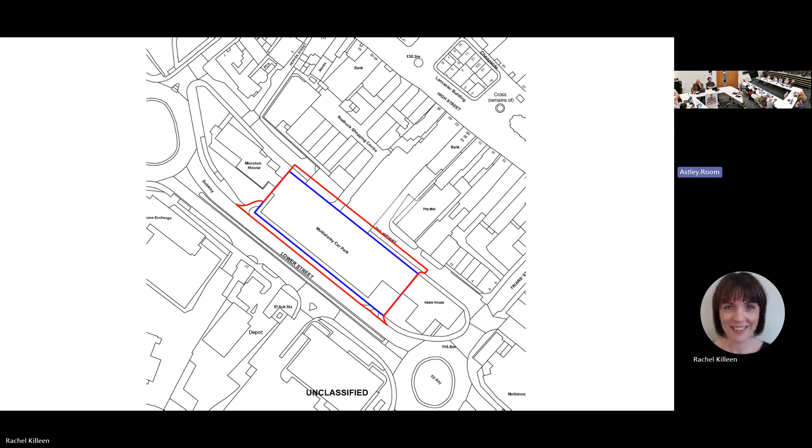It fronts Lower Street, Ring Road to the southwest, and the Midway to the northeast. The proposed scheme would comprise 78 one-bed and 33 two-bed apartments across 5 floors. Significant elements of the existing car park structure would be retained and repurposed, and the footprint of the building would remain the same. Cuts to the existing slabs and central spine wall would create a central void and open up the existing interior to create new internal circulation spaces, with a new roof structure added at roof level to provide additional residential accommodation.

This is the floor plan of the lower ground floor, which fronts onto Lower Street. You'll be aware there's quite a significant difference in levels between Lower Street and Midway, which is why this is a lower floor. Vehicular access on Lower Street at this point would be retained, providing access only to the substation and plant, which is in this area here.

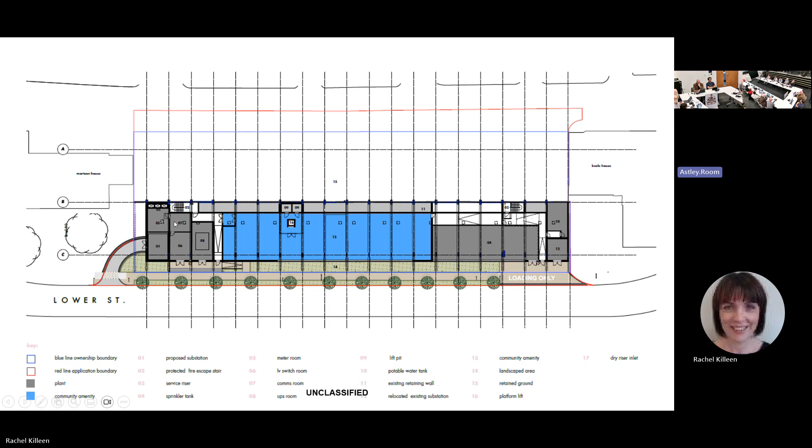Moving on to the first floor, a new vehicular access would be formed at the eastern end of the Midway site frontage, here into the car parking area. The car parking area is underneath the level of the Midway, so access would be down this ramp into the parking spaces.

A drop-off lay-by is proposed on the Midway frontage outside the main entrance. Refuse collection and other servicing would be focused on the Midway, with the bin store also on that frontage. Loading bay areas would be provided on the site frontage as part of a new landscaped area for use by refuse collection and other delivery vehicles. The site management team would move the bins to this area for collection. Domestic and community waste and recycling stores would be incorporated at level 2 and accessed directly from the Midway.

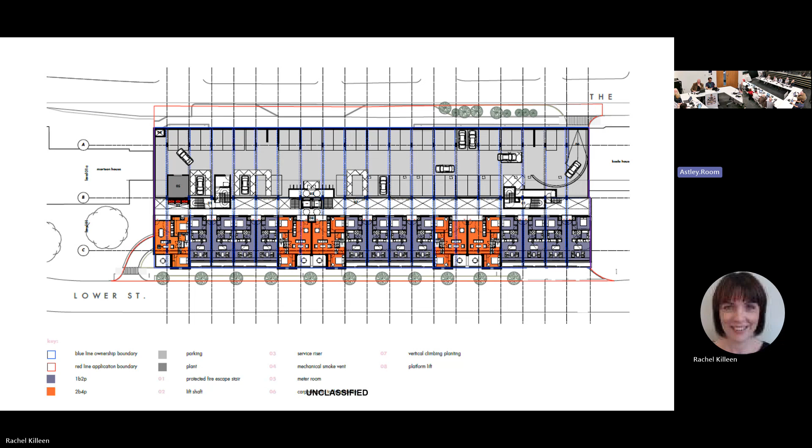49 car parking spaces are proposed, comprising 45 standard spaces and 4 accessible spaces. 116 cycle spaces would also be incorporated across the development. The Highway Authority has no objections to the application, subject to conditions.

This is what's referred to as floor 2, but from the midway level it's the ground floor in effect, and the main entrance into the building. This is the main entrance courtyard, in a centralised location, providing level access from the midway. This would utilise the existing vehicular entrance to the car park.

From this main entrance, apartments would be accessed via open air walkways, framing the new void space between the rows of accommodation. All accommodation will be provided with a recessed balcony or terrace, providing significant elements of private amenity within the scheme. Further amenity space would be proposed with a communal roof terrace at level 5.

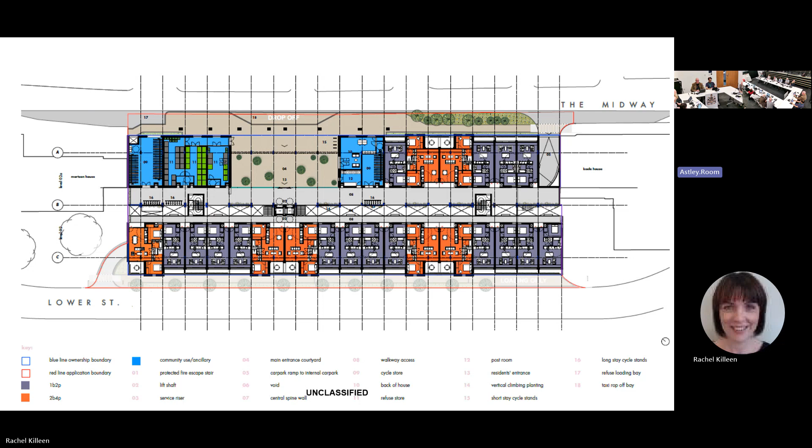Just looking at the other floors - this shows the general arrangement. We've got here a mix of 2-bed and 1-bed apartments, and this is the void that I referred to previously above the main entrance.

This is the amenity space on the roof level. These are the units that you'll see later coloured in red that are at roof level.

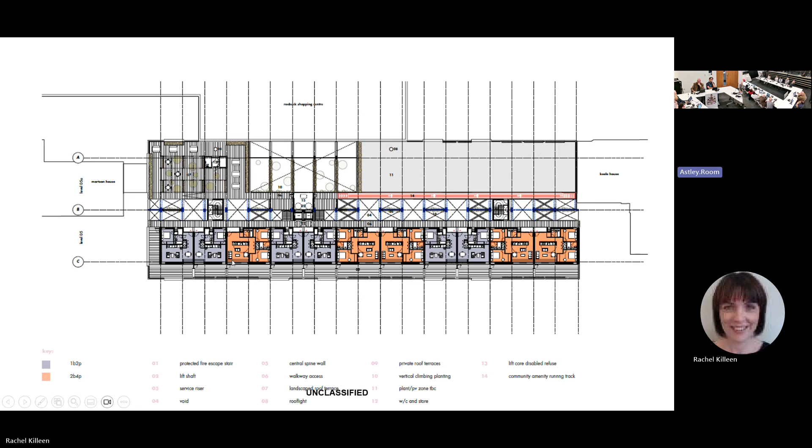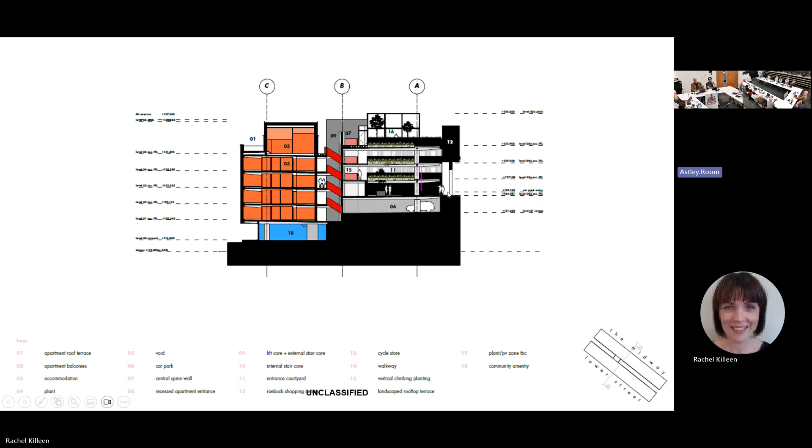This is a section through the development taken centrally, just to show you the difference in levels. We've got Lower Street here and Midway here. That's the main entrance for pedestrians into the building, and as you can see, the car parking is underneath and accessed via that ramp.

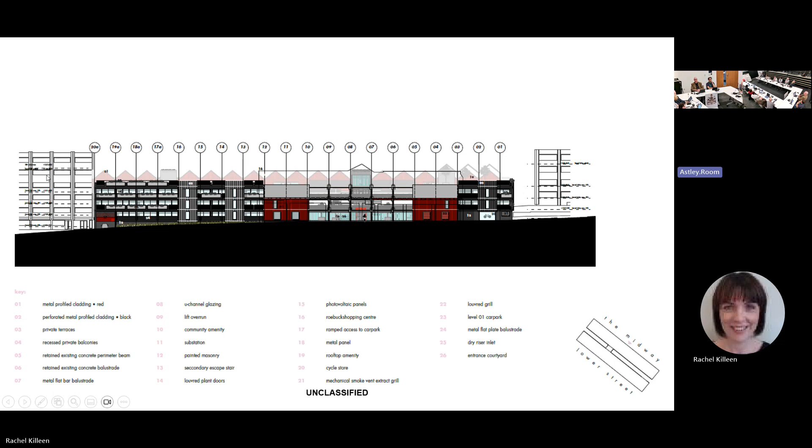It doesn't show particularly well given the scale of the building, trying to show it at this scale. But you can see there, that's the elevation on Midway, and that's the entrance I've referred to several times. You can see Morston House, which has got planning permission recently to convert to residential, and that's also residential accommodation at the other side.

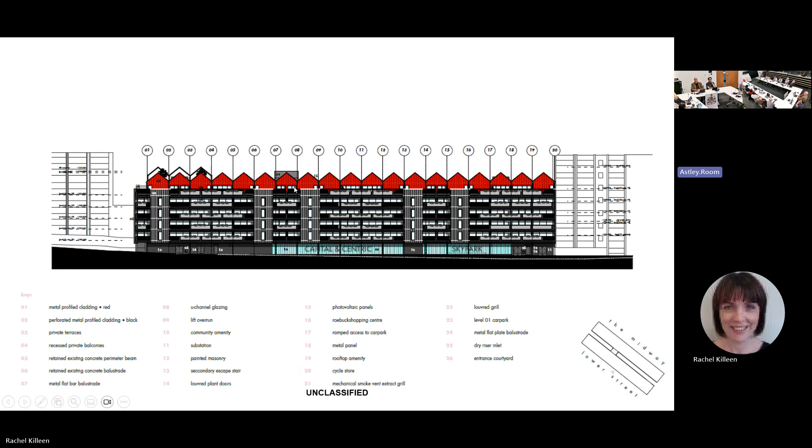So that's the elevation from Lower Street. These are the additional residential units that are being added onto the roof of the building.

This is a section just to show in more detail the proposed materials. There'll be a combination of the existing grey concrete structure of the existing building with red, black and charcoal coloured cladding. The new roof structure would be a series of pitches, and the gable ends to those pitches would be clad in red square profiled metal.

Columns of black perforated corrugated cladding would feature at regular intervals along the frontages to Lower Street and Midway. The proposed new facades are designed to be contemporary, but to draw reference from the architectural features and tones of the area. It's considered that the articulation of the roof pitches would add variety to a mixed roofscape, in contrast to the existing expansive area of flat roof.

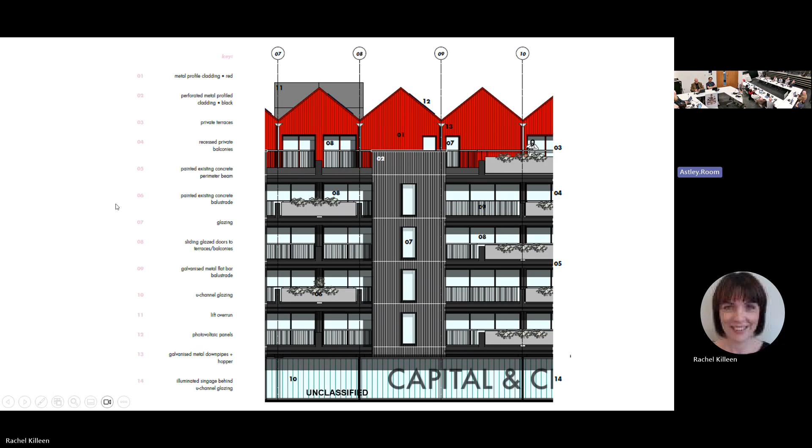That's probably the best image to show you overall how it's proposed that the building would look. It's considered that the scale and design of the development would be appropriate, and with the implementation of an appropriate landscaping scheme to soften the building, it's not considered that there would be any adverse impact on the character and appearance of the surrounding area.

The site is within the conservation area, as I mentioned previously. A heritage statement that accompanies the application concludes that there would be no harm to the significance of designated or non-designated heritage assets, stating that the proposed development would repurpose and enhance a building that is recognised as currently making a negative contribution to the conservation area.

Your officers agree, stating that the development would make a positive contribution to the area. The introduction of a residential use in this area should benefit the town centre, making it a more vibrant place, providing more activity and natural surveillance in this area of the town centre, and should help to lift the area. Thank you.

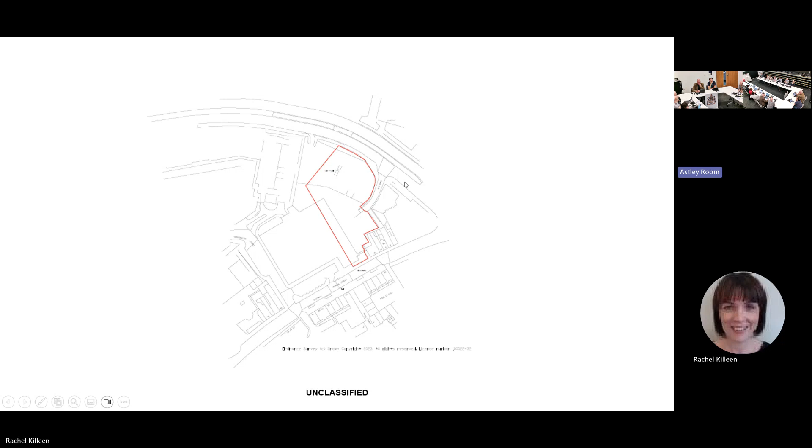Full planning permission is sought for a development of 53 retirement apartments, which would be age restricted to 55-year-olds and above. The site is part of the wider master plan aspiration for Ryecroft, which includes a multi-storey car park and a residential development scheme that Mr. Crews made reference to, which we'll be looking at later on the agenda. This is the current scheme we're looking at now. The site adjoins the Newcastle Town Centre conservation area.

The proposed 4-storey development would comprise 37 one-bed and 16 two-bed apartments, all self-contained with communal facilities, including a shared residence lounge, mobility scooter store, attached refuse store, and communal garden.

The location of the development has been dictated by the existing site constraints and the shape of the available plot. Here you can see the footprint of the building on the site. It would be L-shaped with the longer elevations facing the wider Ryecroft site, while the shorter elevations would face Ryecroft here and the rear elevations of buildings along Merrial Street here.

This is the access into the site off current Rye Bank. There is currently an access at that point. There are 2 other accesses into the site which will be closed off, so that will be the sole access, and this will be the car park area here to the rear.

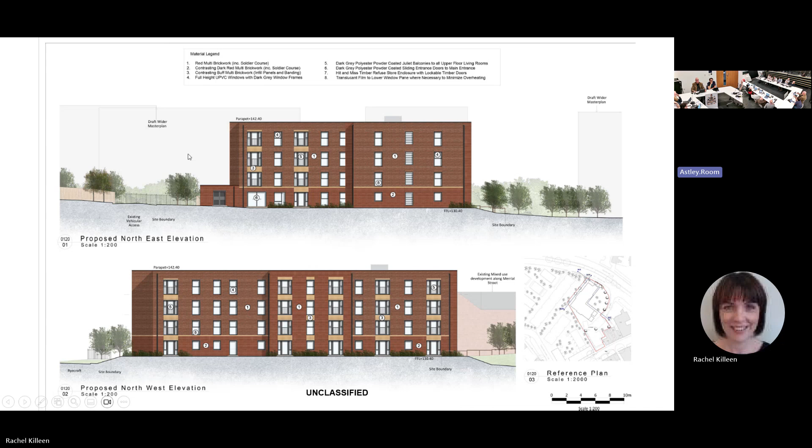It's considered that the design and massing of the proposed building would be consistent with both existing development and that proposed on the remainder of the wider Ryecroft site. As said earlier, access to the site would be from Rye Bank, with a car park proposed to the south of the building, providing 22 spaces, including 2 accessible spaces.

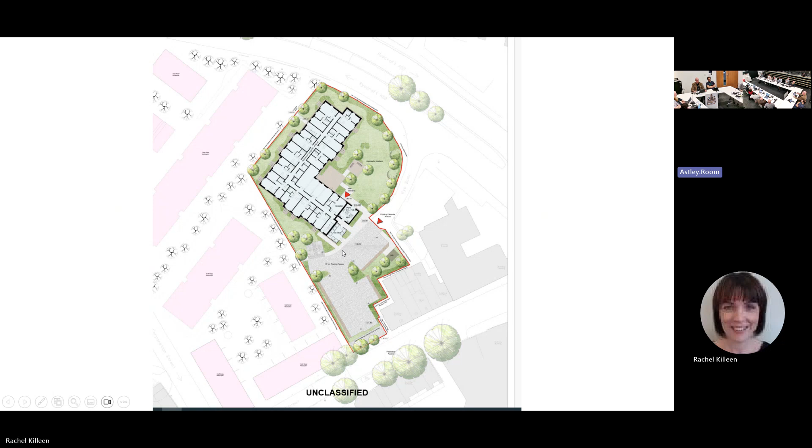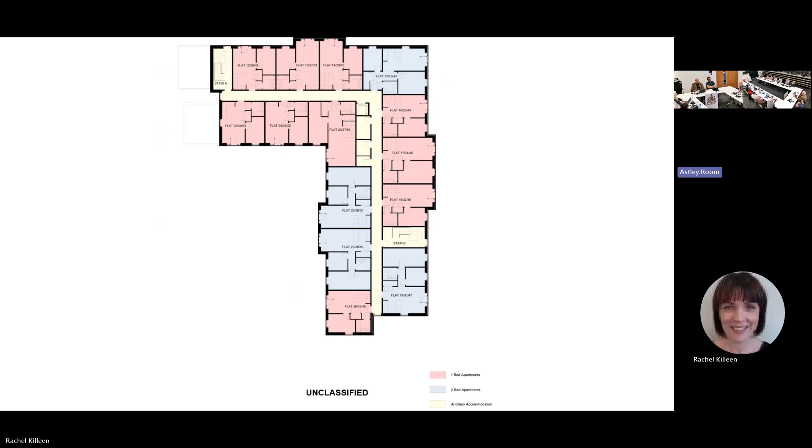The maximum parking standards in the local plan for this type of development require a maximum of 1 space per 3 dwellings, which equates to 18 car parking spaces for the proposed units. A transport statement submitted with the application looks at other McCarthy Stone schemes in comparable locations and concludes that 22 car parking spaces would be suitable for the proposed development. No overspill parking is anticipated, with suitable on-site provision provided in balance with expected demand and local standards.

A heritage statement accompanying the application concludes that the proposed development will cause no harm to how the significance of the conservation area is understood, and that there are no other designated or non-designated heritage assets which would be adversely affected by the development. The Conservation Officer agrees with the findings of the heritage statement and raises no objections to the scheme.

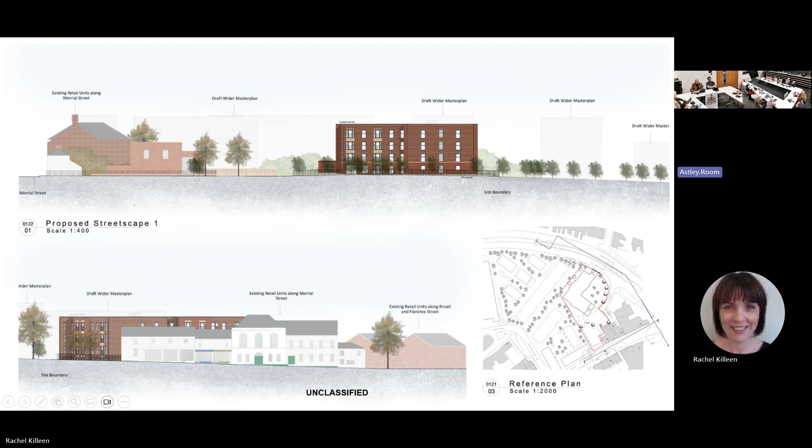These are streetscape views just to show you the relationship of the building with the existing and proposed development. These are the existing buildings on Merrial Street. The wider master plan developments will be behind that building and over to the right hand side here. This is a view on Merrial Street showing the existing buildings at the frontage, and then the building behind.

This is a previously developed site in a highly sustainable location within the area. The site is an easy walking distance of the shops and services of the town centre. It's considered that the site provides a sustainable location for additional residential development that would accord with the town centre supplementary planning document.

Thank you, Rachel. As for the previous application, I'm not aware of any speakers or objectors to the scheme. I'll now open it up to councillors.

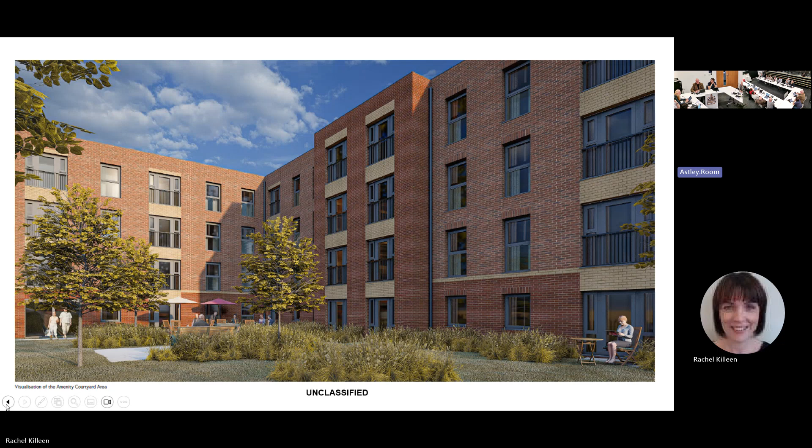Thank you, Mr. Chairman. Once again, I think we should welcome this scheme. This is a site in our town centre which has lain dormant for some time now. What we're seeing this evening is breathing new life into an area which desperately needs new life, to make the town centre live an extra time.

I welcome what the Conservation Officer says, and I thank the office very much for the drawings, which I think place the development in context and make it, certainly for me, far more understandable in that regard. I can see how the proposed finishing of the building will fit with the frontage on Merrial Street.

It's not a particularly ambitious building, but nonetheless it's not an unhandsome building, and it is a planning gain over the supermarket that was there prior to this site, and certainly a planning gain over the wasteland currently on that site.

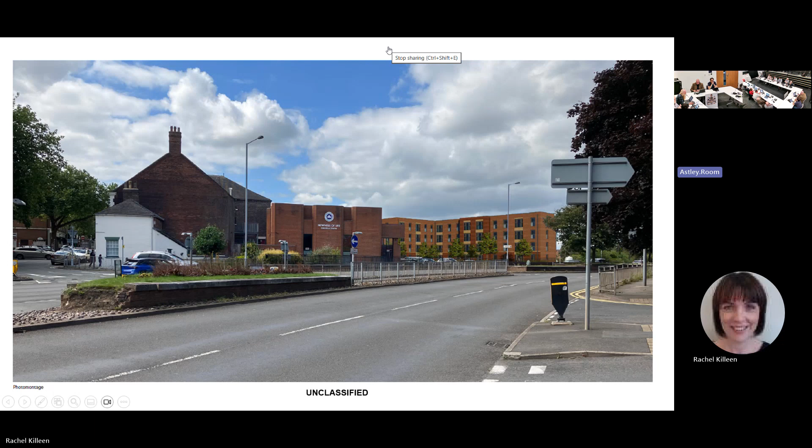As such, I think it shows that the council - and unfortunately I wasn't at the full council, but I know there was cross-party support for the regeneration of our town centre in this regard - and I think this once again shows that we are committed to breathing life into our town centre, making it a vibrant place. The fact that we're having residents within the town centre will help that in a very great way, in my personal opinion.

So once again, I welcome this development and would wish to move the recommendations as they're printed in front of us.

Thank you once again, Councillor Fear. Duly noted. Any other councillors wishing to speak? Councillor Wielden and Councillor Brown.

Just a comment really to say that it's an incredibly innovative programme of building yet again. People sometimes forget, when they're involved in developing, that the focus is on starter homes for young things. The over 55s tend to get forgotten, and as far as I'm concerned, they are the anchor of a community.

To be so well looked after, so that they've got everything on their doorstep, which this particular development has for the older population, is to be applauded and recommended. I think it's exemplary, and I congratulate all the councillors on planning who voted for it, and also the developers too who designed it.

Well done. Thank you, Councillor Wielden. Councillor Brown. Thank you, Chair. I would echo the comments already made.

I'm just a bit concerned about the parking specification on a 1-to-3 ratio. Over 55s these days certainly aren't the pipe and slippers brigade we were led to believe years ago. They've got very active lifestyles and would probably want to have visitors too. So I'm wondering whether the 1-to-3 is a specific specification for over 55s. I'm concerned, thinking about the number of parking issues we have in the centre of town, that this could displace some parking.

That brings us on to item 6 on the agenda, application for major development at 5 to 7 York Place, Newcastle-under-Lyme, found on pages 31 to 44 of your agenda pack. And this item also includes a supplementary report, which I assume everybody has had a chance to read.

Over to you, Rachel. Thank you, Chair. Full planning permission is sought for the repurposing of the former York Place shopping centre into commercial units at the ground floor and 42 apartments on the upper floors.

Again, members will all be aware of the site, I'm sure, but just to show you here on the plan, so the site edged in red, it has frontages with Merrial Street, High Street, Lad Lane, which is just there to the southeast, and Fogg Street to the west. It lies within the Newcastle Town Centre Conservation Area and close to a number of listed buildings, including the Old Bull's Head pub, which is just here, and St Giles's Church just there.

So just for a bit of context, the wider Ryecroft site is just here, across the other side of Merrial Street. So the site we've just been looking at, the McCarthy Stone one, is just off the plan to the north, and you can see the former civic offices there, which will be the site that we're going to be going on to talk about next.

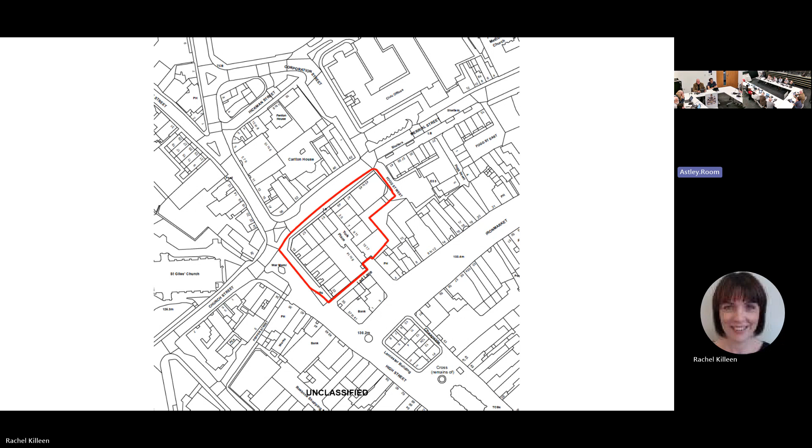This proposal would see the core of the existing building largely retained and repurposed, including the existing concrete frame and floors. Part of the rear access ramp leading to the delivery area is to be demolished to allow for an external connection between Merrial Street and Astley Walk, and the creation of a public square to the rear of the building.

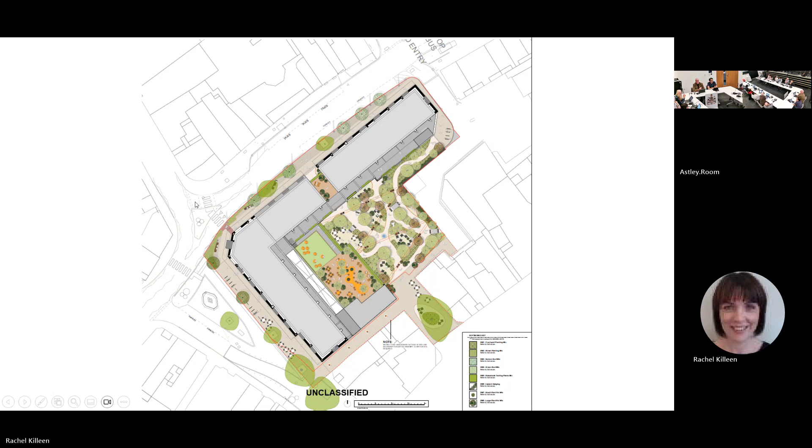So this is the ground floor with the commercial units of varying sizes. And then this is the landscape area at the back, with access through here off Merrial Street.

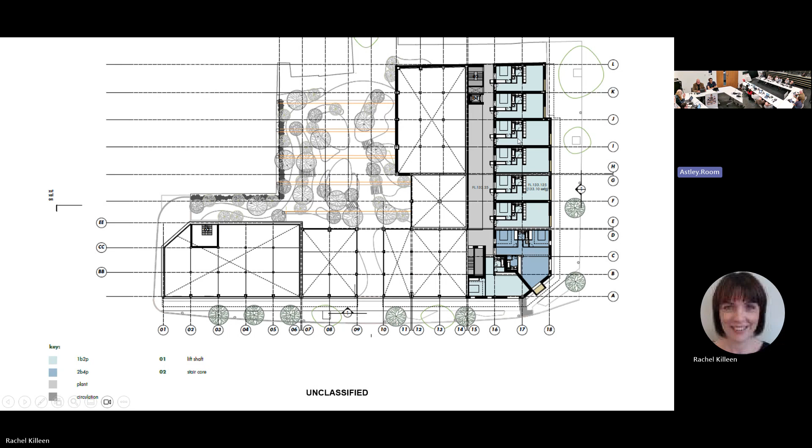So then floors above are a mix of 1-bed and 2-bed apartments. You can see there the 1-bed in light blue and the 2-bed in the darker blue. The grey areas are the circulation areas and how people access the individual units. And then there's a landscaped terrace area there.

So that's the top floor of the scheme.

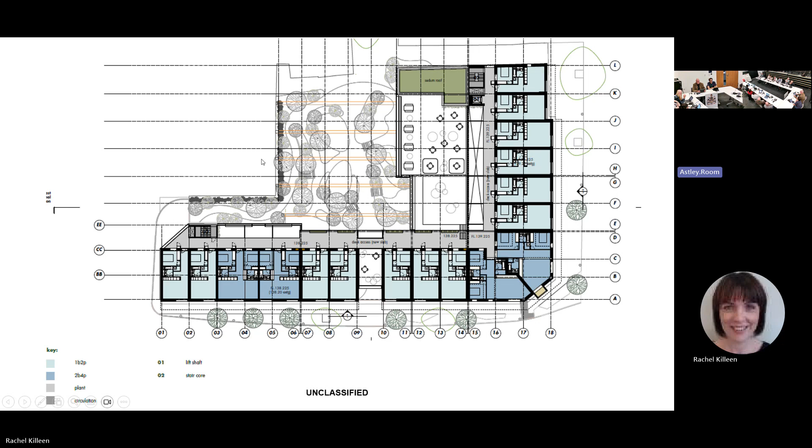Again, it doesn't show up particularly well on a screen of this size with a development of this size, but the proposed materials would consist of brown toned standing seam cladding for the frontages, with glazing to the ground floor for the commercial units. Dark grey window frames and dark grey cladding would be used for architectural detailing, and the roof line would be pitched with dormer style windows, which you can just about see there, but I will show you some images that show that better.

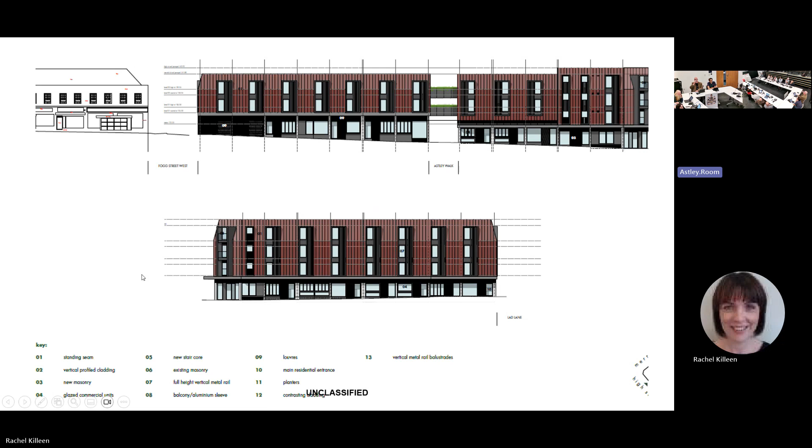As referred to previously, a green public square would be located to the rear of the building, adjacent to Astley Walk.

These are just the other elevations of the building. So that's looking from High Street there. That's the side of the frontage onto High Street, and that's Astley Walk through there.

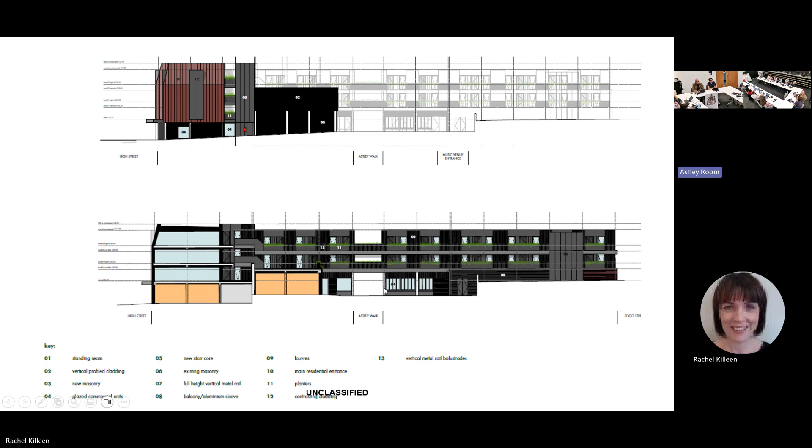This is the rear of those units on Merrial Street that you would see from Astley Walk and the green space at the rear.

The heritage statement submitted with the application concludes that there will be no erosion of the significance of the conservation area, and there'll be no erosion of the significance of either the Old Bull's Head or other nearby listed buildings. The Conservation Officer comments that the scheme is bold and high quality, and that the colour palette would be effective within the town and a good balance against the adjacent historic buildings.

It's considered that the proposed development would be appropriately sited, of suitable height, scale and mass, and would use tones and materials characteristic of the conservation area and consistent with nearby listed buildings. The appearance of the development, due to the active frontage at ground floor and the appropriate use of materials, would present a high quality building that would be a significant improvement on the existing York Place and would enhance the site, street scene and conservation area.

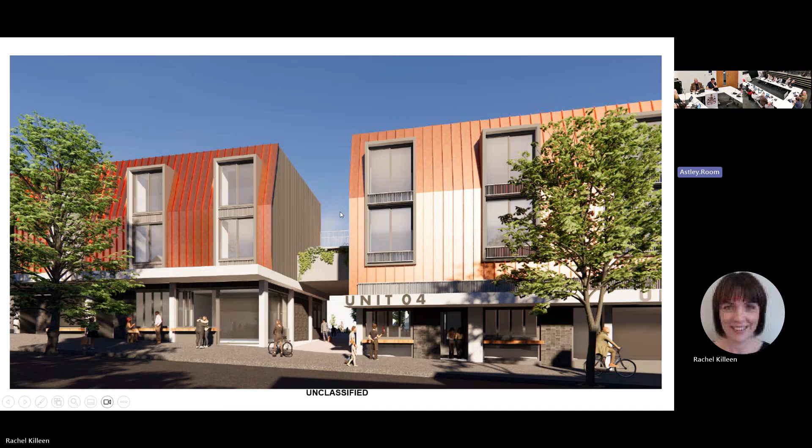And that's just another view to show the materials.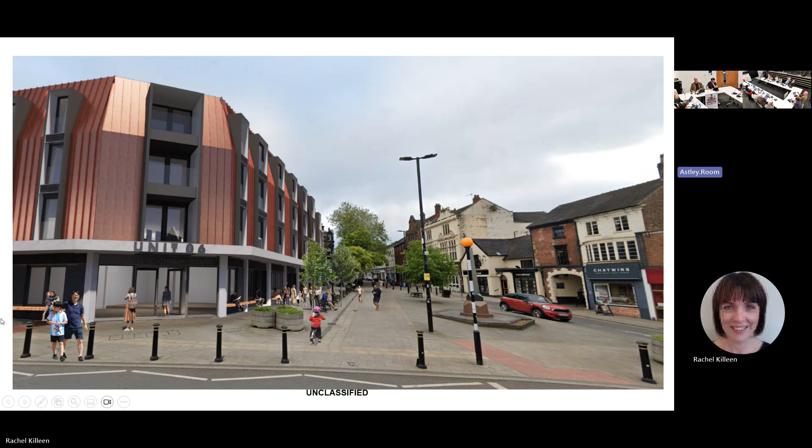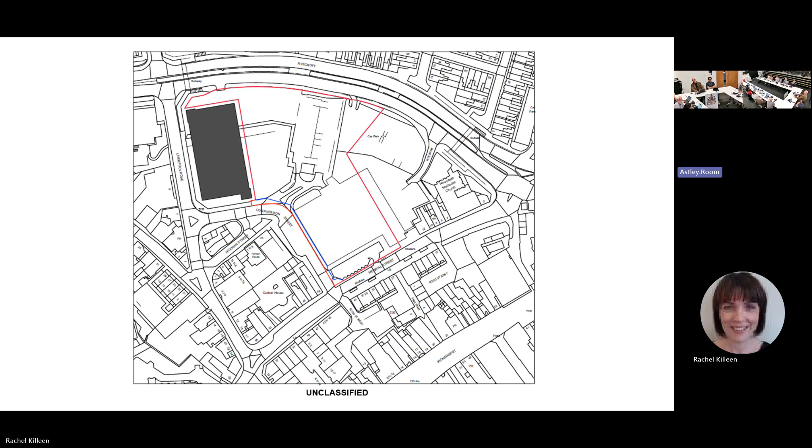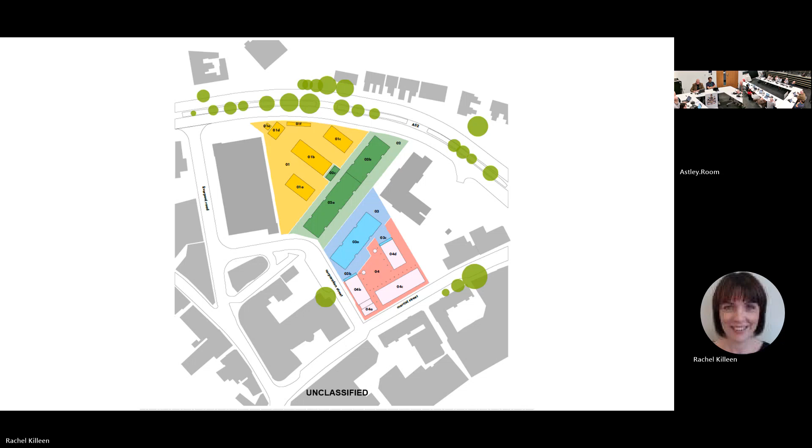A lot to see on this slide, but you can see the multi-storey car park and the McCarthy Stone development, so it's a good one to show everything in context. This is the green, landscaped link proposed through the site, acting as the green heart of the scheme.

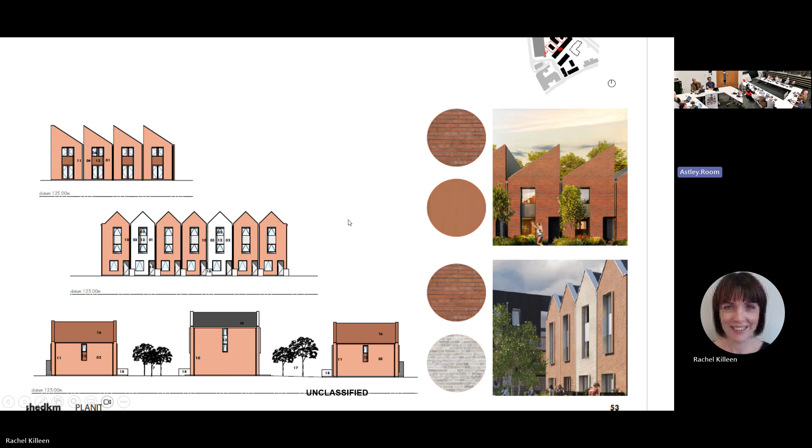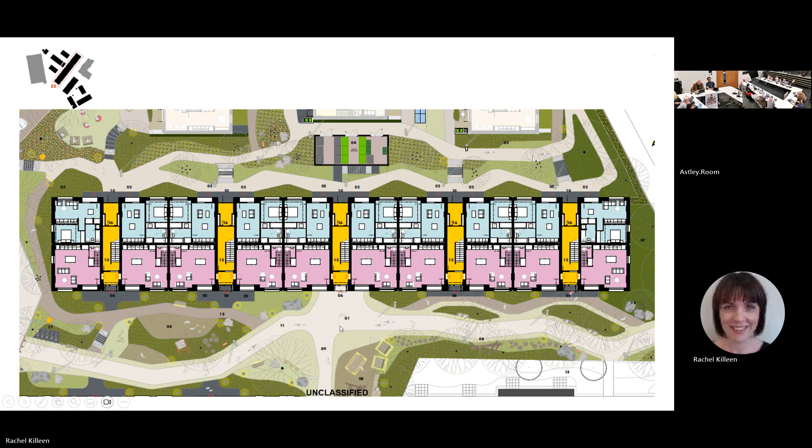The new green spine referred to earlier would be lined either side by 2 four-storey apartment buildings, ensuring this key public route benefits from surveillance. The longer block would comprise dark grey profiled cladding and grey brickwork with accentuated reveals and butterfly roof profiles, creating a distinctive style. In contrast, the shorter block would comprise red brickwork with a flat roof. I'll show some images later which show better what they'll look like.

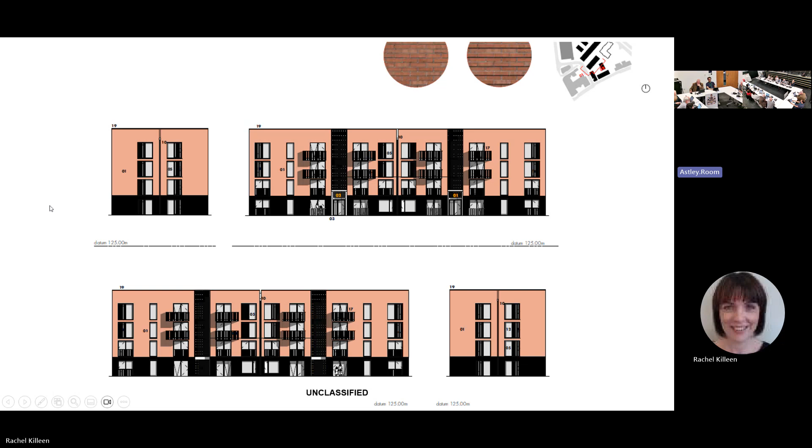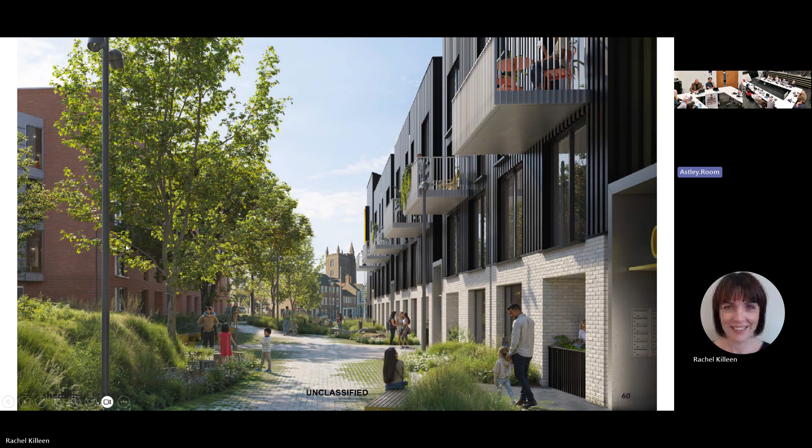To the south is the corner I pointed out previously, Corporation Street and Merrial Street. A new courtyard building is proposed around a green public courtyard, providing an enclosed public green space. The blocks would have a prominent presence on Merrial Street and Corporation Street, with a relationship back to the town centre and the neighbouring redevelopment at York Place.

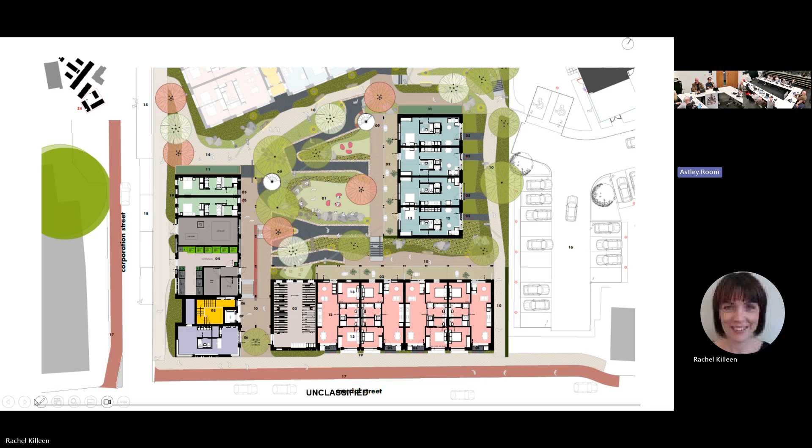These are the elevations of those buildings - shown on the ground floor as separate individual blocks, but linked at higher levels by access connecting the blocks, proposed on the courtyard's interior. That's probably the best image to show those blocks: Corporation Street, Merrial Street, red brickwork with significant areas of detailing to provide interest, interesting reveals to the windows, and pitched roofs. There are 5 gables at that point, with other elements of the building flat roofed.

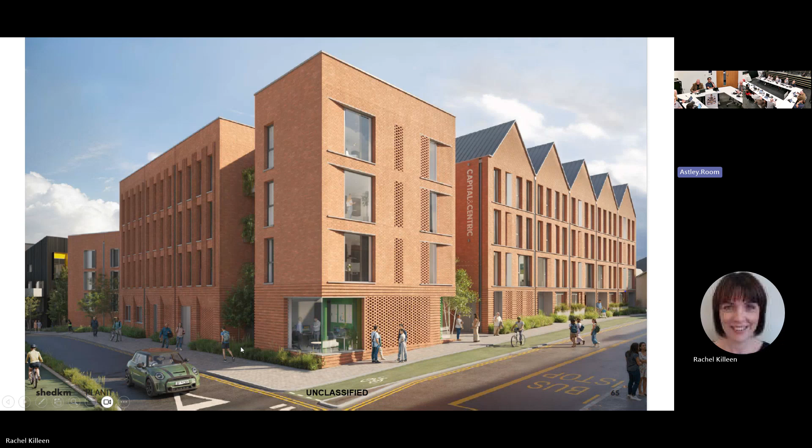So this is some streetscapes to show you the relationship with the existing buildings. We're looking here from Merrial Street, that's Corporation Street that would run down the side of the building. So existing buildings here on Merrial Street, and the McCarthy Stone development would be behind there.

And this is an elevation from Corporation Street. So you can see here the housing, the 2- and 3-story housing that's to the north of the site. And then you've got the 2 blocks with the green walkway between. I referred to the butterfly design of the roofscape that you saw there. And then the corner block at the corner with Merrial Street.

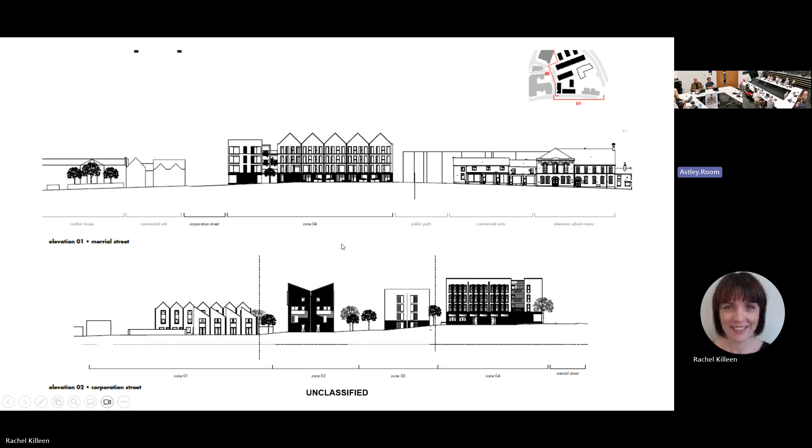So the landscape master plan would be formed from 5 distinctive landscape characters complementing each other to make a livable and sustainable place for residents.

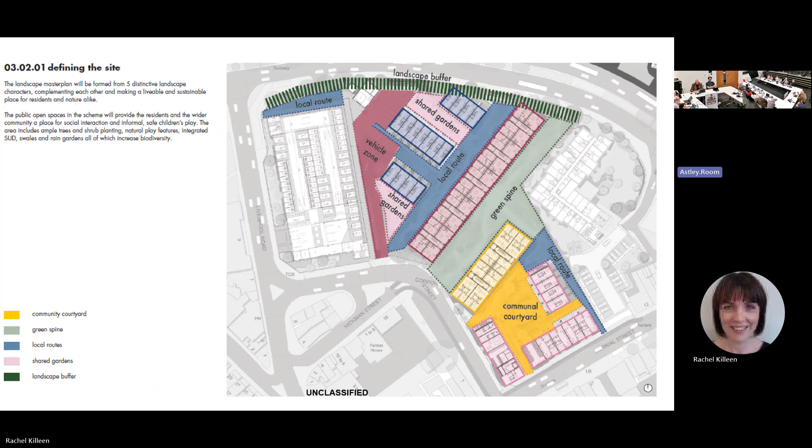The proposed site layout would be largely vehicle-free. Clearly defined pedestrian routes would be provided throughout the landscape layout, which would provide access to the dwellings and a means of accessing the site via Corporation Street, Merrial Street and Ryecroft.

I'll just go back to show you the site layout.

So the development would provide 21 parking spaces. So the houses which are in this part of the site here, 15 houses, and there would be 15 spaces, so 1 space per dwelling. And then the apartments would be provided with a total of just 6 spaces across the site.

Temporary stopping activity for deliveries and servicing is proposed via provision of a new loading bay here on Corporation Street. It's where there's a number of parking spaces at the moment. They will be changed through a traffic regulation order to a temporary stopping area. The Highway Authority has no objections to the proposal, subject to the imposition of conditions.

So overall, it's considered that the scheme would regenerate a previously developed site in a highly sustainable location and contribute positively to the vitality and viability of the town centre. Thank you.

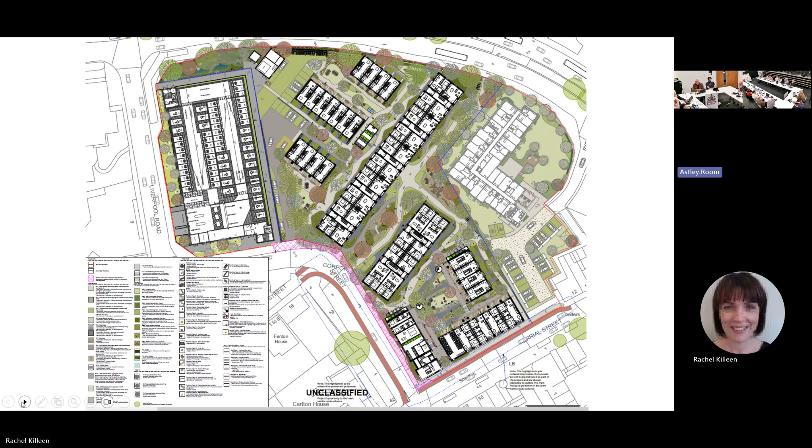I'd like to go on record for this, as I find this one, out of all the ones that we've heard tonight, the most exciting and appealing to myself. This is a massive and ambitious scheme. 4 zones provide that interest and multifaceted part of living for potential occupants.

I love the green thread and spine going through it. What I particularly like is the fact that it's part of that gateway of major buildings that will be from the northwestern boundary as you approach Newcastle, but also remembering to link in with the previous applications that we've heard tonight as part of the master planning for Newcastle and the once in a lifetime opportunity to spend the investment that we've been bestowed upon us, which I find very exciting.

And subject to members' further comments, I would like to formally propose this development. Thank you. Over to you, councillors.

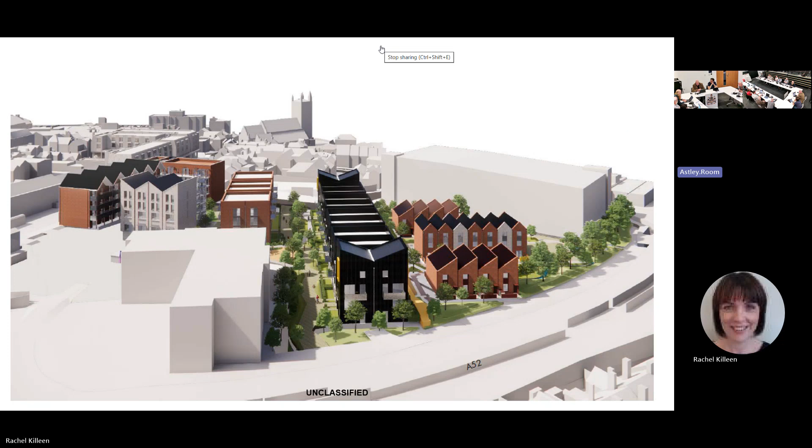Chairman: Thank you, Councillor Sweeney. Any other comments? Okay, just a final comment, to thank our officers and also councillors for interacting with the developers who have worked with this council on our journey to this point. They've listened to comments that have been generated by councillors, and I draw on the councillor who isn't here tonight, Councillor John Williams, who's been quite vocal in making this work so well.

But the fact that hard work has been done, not just here but outside this meeting, and the brevity of some of the comments tonight don't really reflect that we've actually put a lot of hard work collectively into these schemes. I just wish it every success. So I formally propose this from the chair. I've been seconded kindly by Councillor Fear. Can I see a show of hands in support of the recommendations as printed? And that's unanimous. Thank you, councillors. That item is obviously passed.

So that's a clean sweep of applications this evening. I've got no items of urgent business. Is there any items of urgent business? I indicate that's a negative.